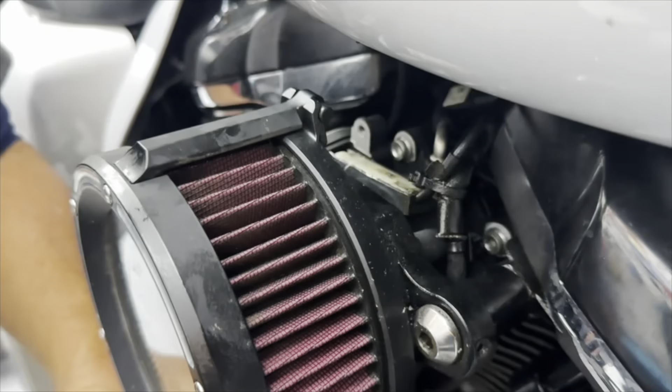The whole manifold's moving. It's not these loose bolts, it's the whole manifold, the whole thing. How about that? So that's a good thing we're putting a new manifold on it. This bike probably will be twice as powerful when we get done with it. Damn.

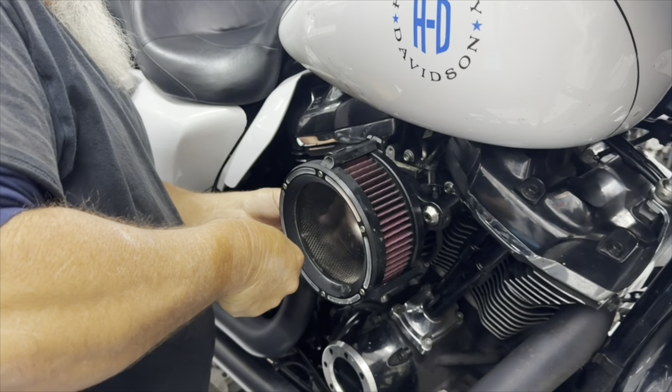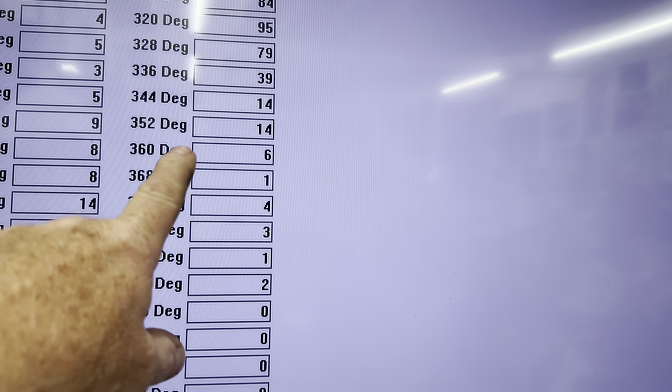On this 2020, we've got some serious temperatures kicking. 400, 376. The normal operating temperature on this one is 320. It should be down here around 272. Yeah, 220, 221, whatever it takes.

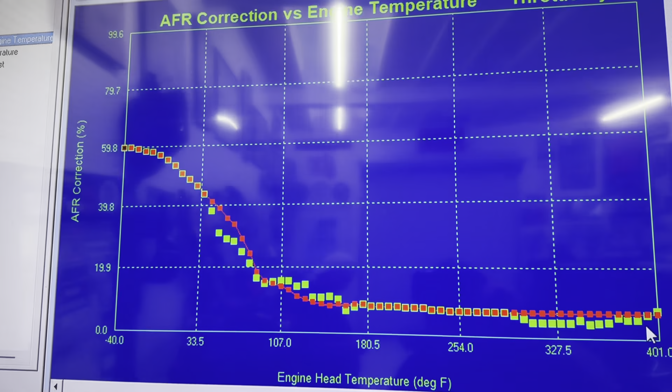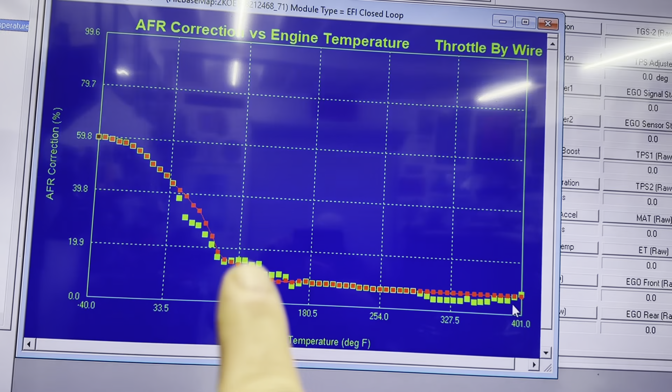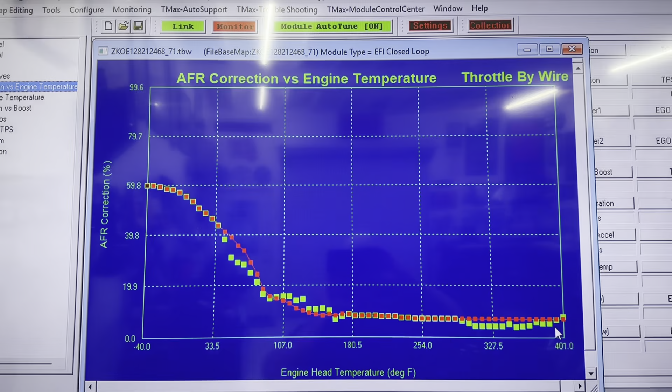Here's another screen on this one. If you'll notice, this is pretty much normal operating temperature, and the ThunderMax hadn't made any changes there. This is way hot, and the ThunderMax is making adjustments up there and down below. 180 degrees, this is just warm up. It just bypasses the normal operating temperature and this is where it lives. So we're gonna make some adjustments on that after the intake manifold is installed and the seals are replaced.

All right, we've got a white 2020 model here, and the intake was very, very loose, the whole thing.

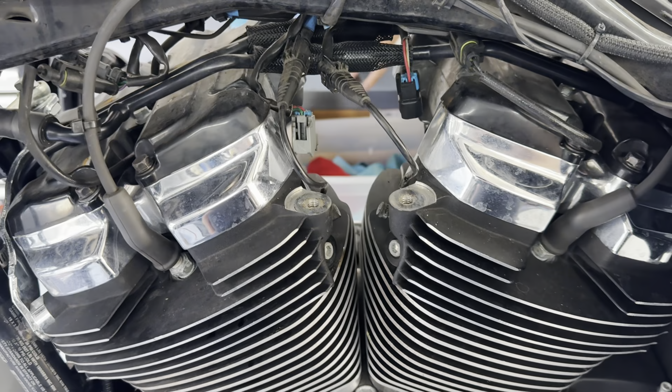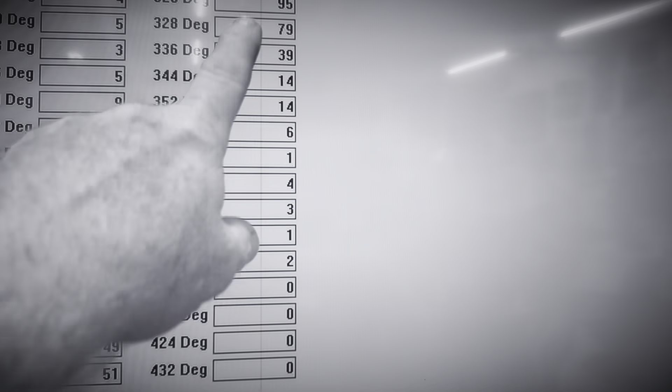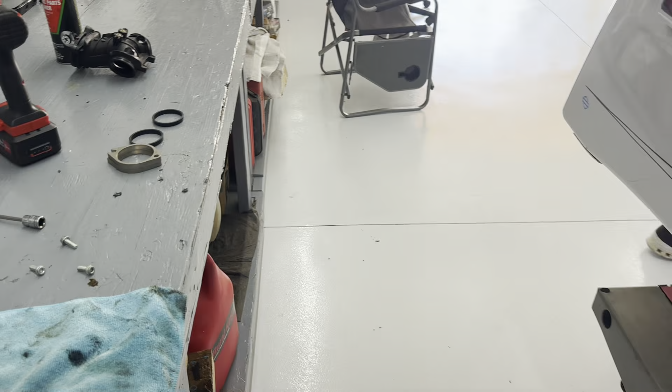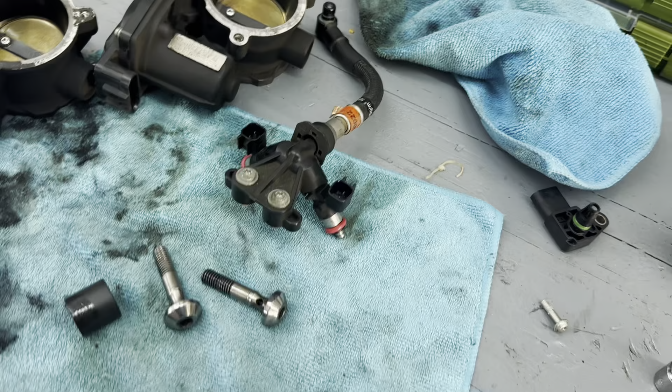I think I've showed where operating temperatures are way above normal. The normal operating temperature on this one is 320. It should be down here around 272. So we are going through here and cleaning surfaces as best we can on all the components, going back in with new O-rings and a new S&S aluminum intake manifold. This bike already had 7.3 injectors, so we don't need to do anything with that.

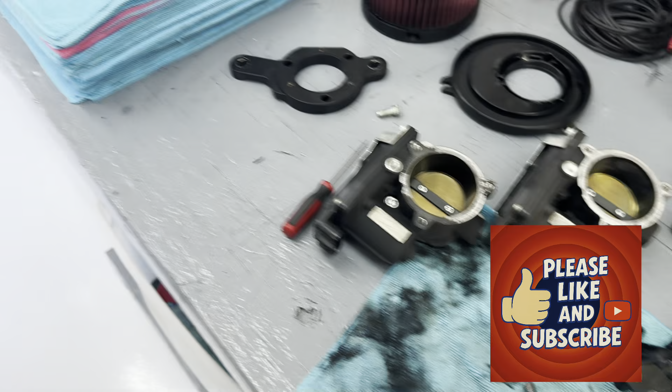So as soon as the manifold gets here, we'll go ahead and install it, crank it up, and get the map straightened out for this thing so it can run cooler and better.